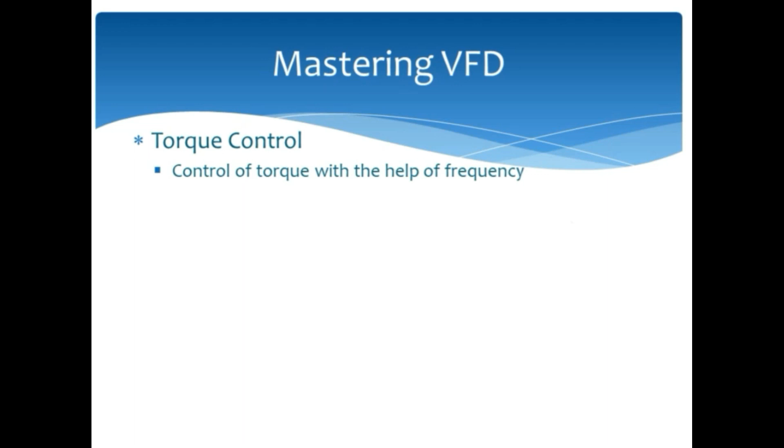Applications which do not require speed control. They require torque to be controlled. And in that case, speed will help in maintaining the desired torque.

Imagine that there is a product which requires tension to be maintained. We will take an example of a paper rolling machine, where if the tension is greater, the paper will get torn apart. And if the tension is less, the paper will be loose and the finishing of the roll will be in bad shape. So for illustration, I have shown here so you get the idea.

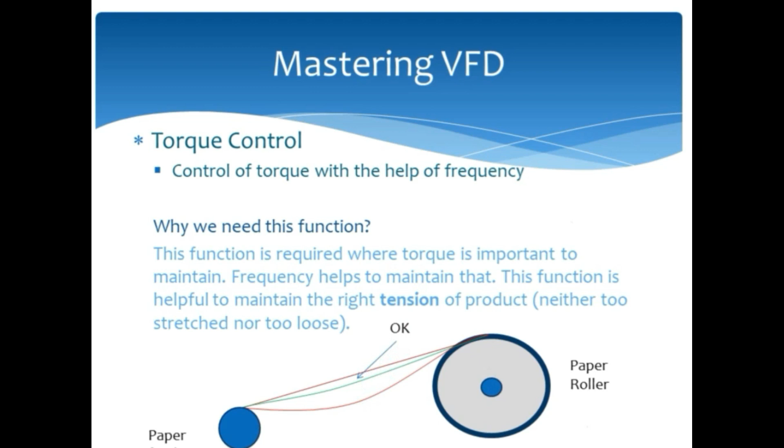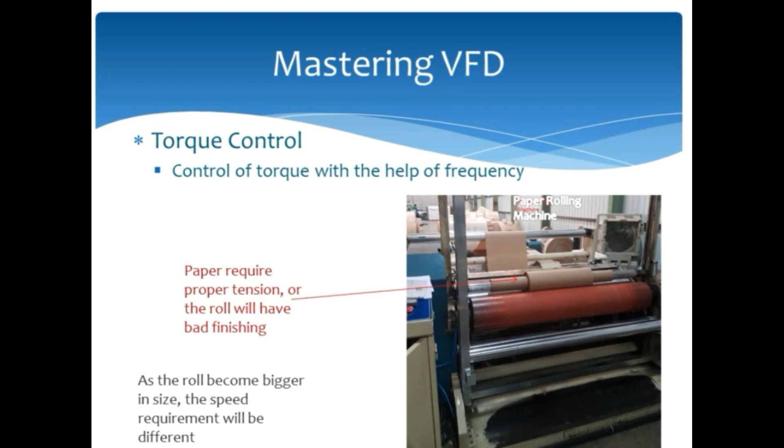These two lines illustrate the paper is either loose or too tight, and this green one shows the paper in proper stretch. So now we understood the purpose. So first thing I want to tell you is that such applications are rare, and most probably you will get a chance to apply this function in plastic film or paper rolling machines.

Here I will show you the demo and we will understand the actual working. I am using iS7 series drive because it has vector control option. Now you notice here the torque, that is the torque which we set, that is our desired torque. Here notice the speed is regulated as the actual torque varies. If torque becomes greater, the speed is reduced, and in case torque is reduced, the speed increases. So this way the torque is maintained.

Now how do we know the torque? Well, it is related to the amperes. In case amperes increase, that means more stretch or more power is applied on the shaft of the motor. And in case amperes decrease, that means the sheet is loose.

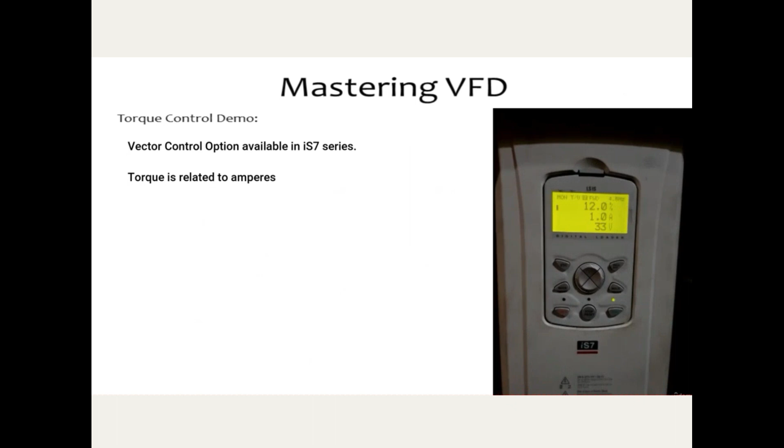For setup, as a first step, I will select the method. It could be vector control which has encoder feedback, or in case we do not have an encoder, which I personally do not recommend. But in case encoder is not available, then we will select sensorless vector control.

And for your information, if you want to use sensorless vector control, then a lot of fine tuning will be required, which will be in the form of setting P gain and I time, and then test the system. And in case the result is not good, then P and I must be set again. So for this reason, if you can use encoder feedback, all the hassle will be avoided.

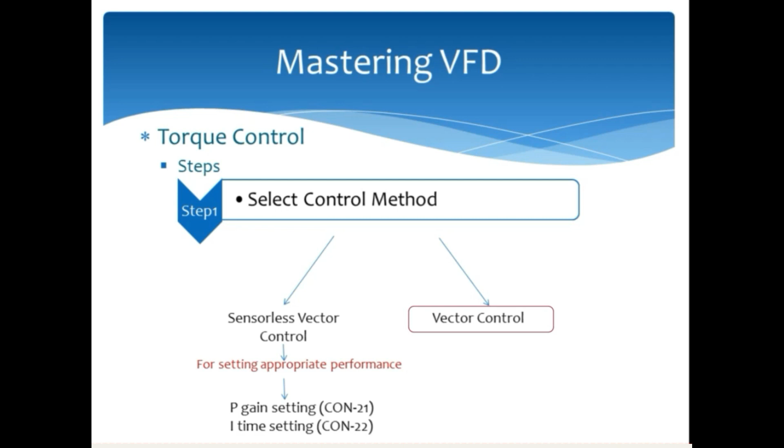Then we need to enter motor data. After that, we need to do auto tuning. So as we studied in previous videos, there are two types of tuning. One is rotational tuning and second is standstill tuning. So based on your site condition, you can select. The rotational tuning is more accurate, but in case it is not possible, then standstill tuning can be performed.

Once finished with tuning, we need to enable torque control. Finally, we need to set the target. We need to tell the VFD what is the desired torque we need to maintain. In this video, I will not go into detail because all the things we have covered in the vector control video. So if I repeat details again, it will be inappropriate.

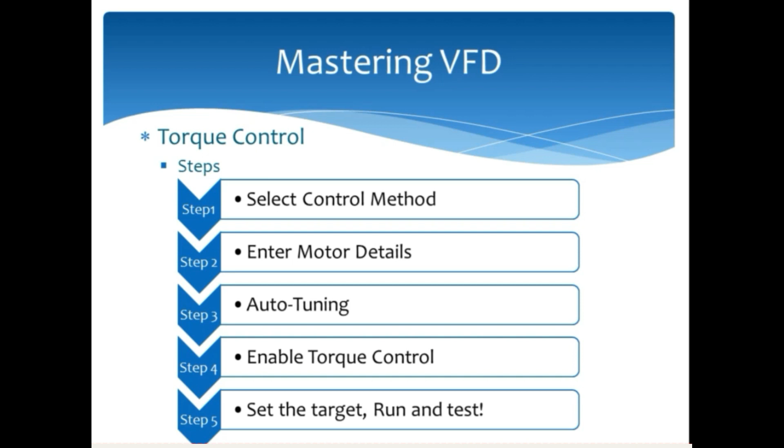So these are the parameters which we should consider for this application. And one more point, you do not need to worry about remembering the parameters or how to find this bunch of parameters. Simply search the manual for torque control, and the manual will indicate the page number. Once on that page, you will find all these parameters together. For your verification, I have attached the page of the manual in the resources.

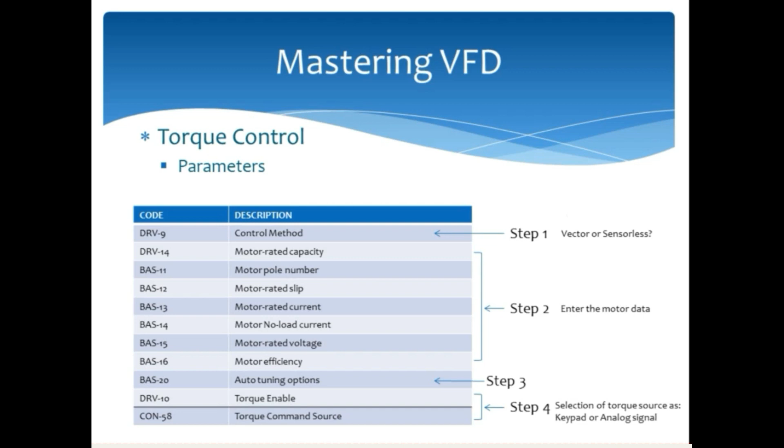Now the first step is to define the control method. Is it sensorless or vector? Second step is to set all motor parameters accurately. And the third step is to do auto tuning. And in the fourth step, enable the torque control and select the torque command source. You need to select whether you want to use the keypad to set the torque value or an analog signal. Once all this is done, then run and test it.